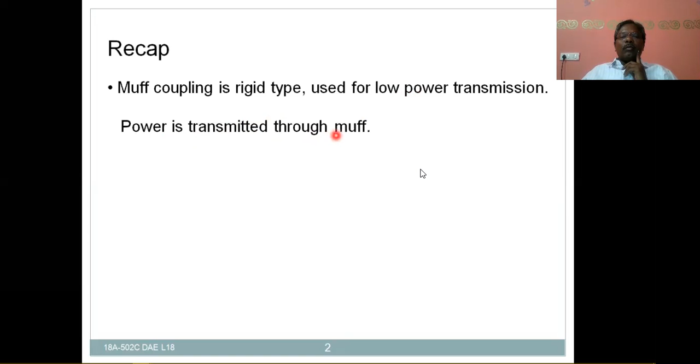In the previous class, we completed muff coupling, a rigid type used for low power transmission, with power transmitted through the muff. In split muff coupling, power is transmitted due to friction between the muff and shaft. For high power transmission, flange coupling is preferable.

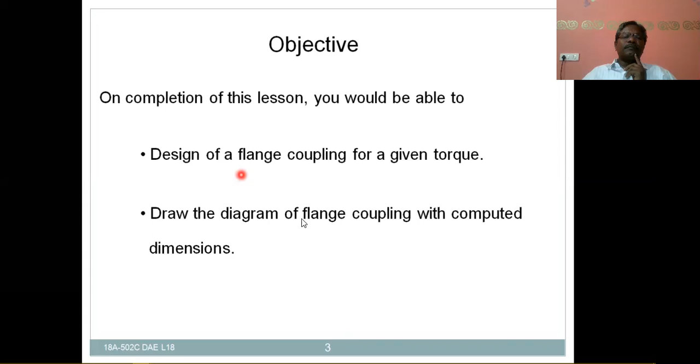Objectives of this lesson: on completion, you would be able to design a flange coupling for a given torque or power, and draw the diagram of flange coupling with computed, proportional dimensions.

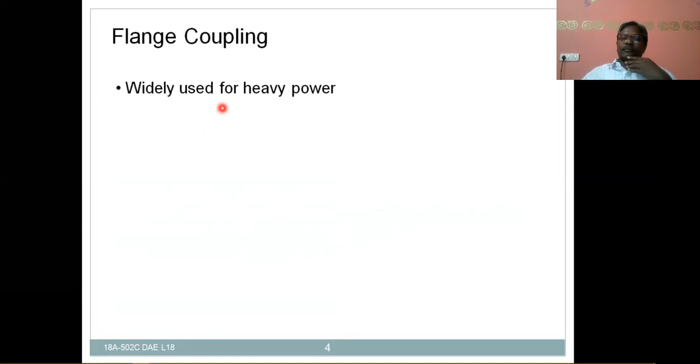Now the flange coupling. Flange coupling is widely used for heavy power transmission, and this power is transmitted at low speeds.

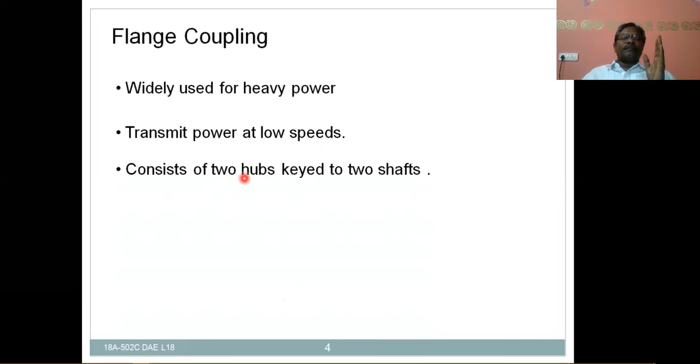This flange coupling consists of two hubs which are keyed to two shafts. The hub extends into flanges whose faces are brought and held together by a series of bolts arranged concentrically about the shaft so that their axes are parallel to the shaft axis.

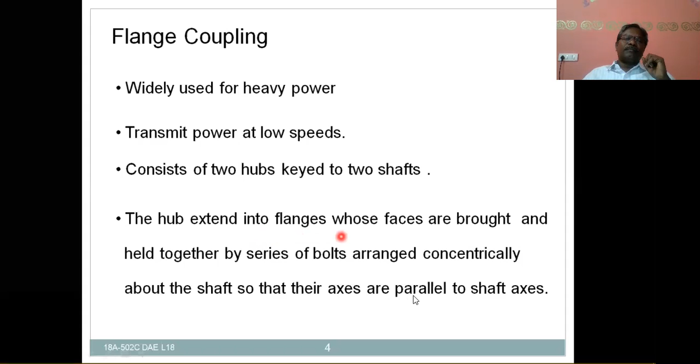To ensure correct alignment, one of the hubs has a circular projection which fits into a corresponding depression in the other hub.

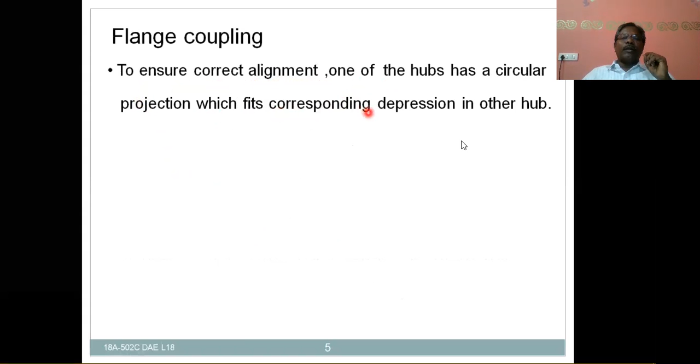Here you can see the sketch of unprotected type flange coupling. These are the two shafts which are to be joined, and this is one hub, and this is another hub, which is generally made of cast iron, while the shafts are commercially made of low carbon steel.

These hubs are extended towards the flanges, and these are the flanges. These two are brought together and held in position by means of bolts and nuts.

In order to ensure perfect alignment of the shafts in collinear axis, there is one recess in this hub - from here to here is the circular recess, and there is a corresponding projection in the left hub.

This projection perfectly fits into the recess of the right side hub. Thereby, the axes will be on the same line, which helps in getting perfect alignment.

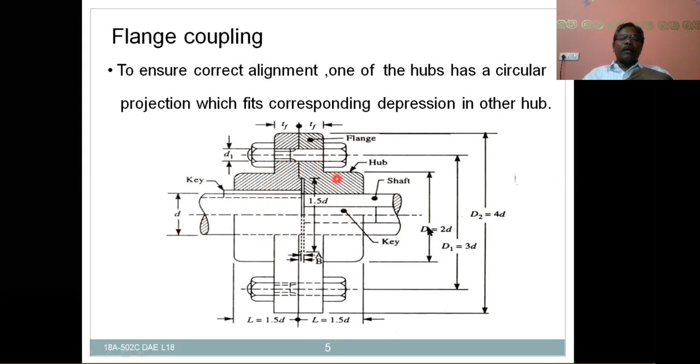Shaft, key, hub, flange, bolts and nuts, then flange, hub, and key, and shaft. This is the sequence of the power or torque transmission flow. The bolts transfer torque from one flange to the other flange and then to the shaft.

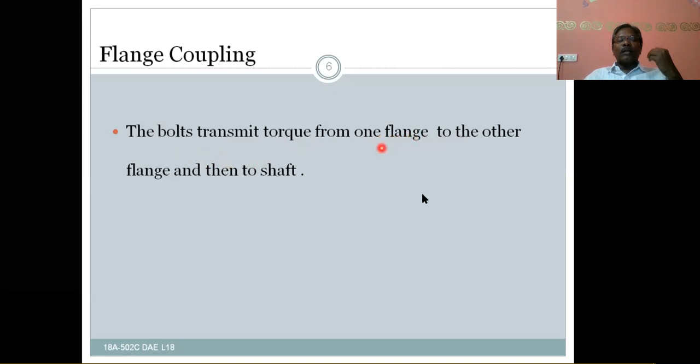Now the design of this flange coupling. Generally, same as in the previous case of muff coupling design - here also the flange coupling is designed with empirical relations first, and these values are checked for the given loading conditions.

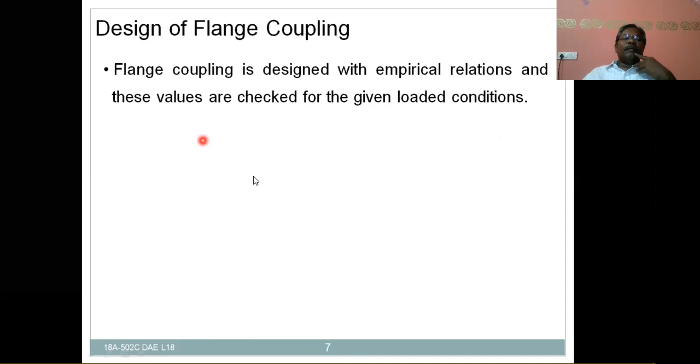And the proportions for CI flange: the outside diameter of the hub D is equal to 2d, where small d is the diameter of the shaft, or inside diameter of the hub, and D is the outside diameter of the hub. L, the length of the hub, is 1.5d.

And the pitch circle diameter of the bolts - through the circle there is a pitch circle, that is dP is equal to 3d.

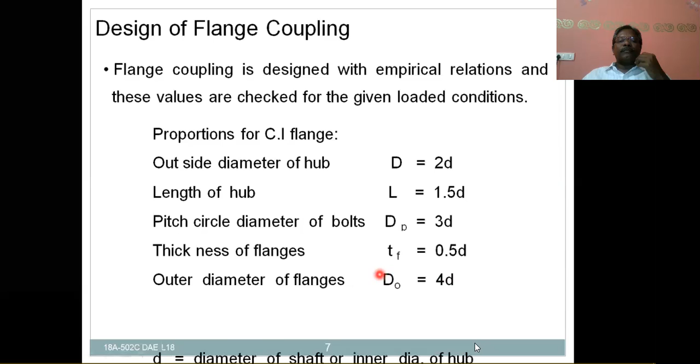Thickness of the flanges TF is equal to 0.5D, this is for unprotected type of flange coupling. And outside diameter of the flanges DO is equal to 4D, where D is the diameter of the shaft or inner diameter of the hub.

So these are the standard proportions as per the standards: outside diameter of the hub D is equal to 2D, length of the hub is equal to 1.5D, pitch circle diameter of the bolts dP is equal to 3D, thickness of the flanges TF is equal to 0.5D for unprotected type flange coupling, and outside diameter of the flanges DO is equal to 4D, where small d is the diameter of the shaft or inner diameter of the hub. These are the standard proportions.

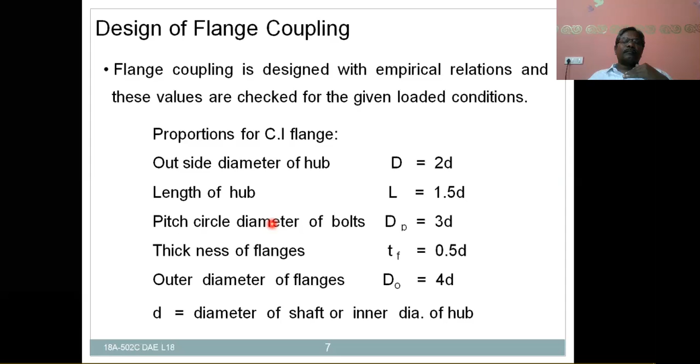Based on these standard proportions, we have to calculate the dimensions of various parts of the flange coupling, and then we have to check for corresponding permissible stresses under the given load conditions.

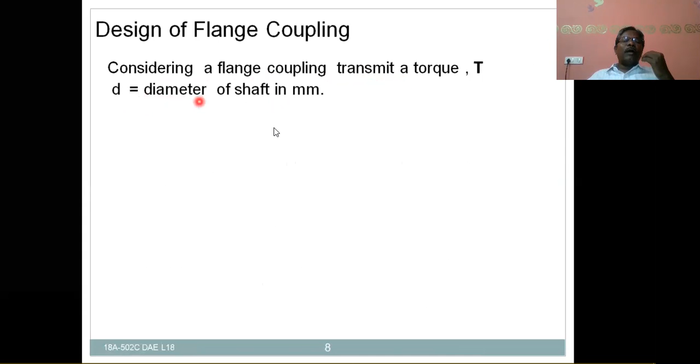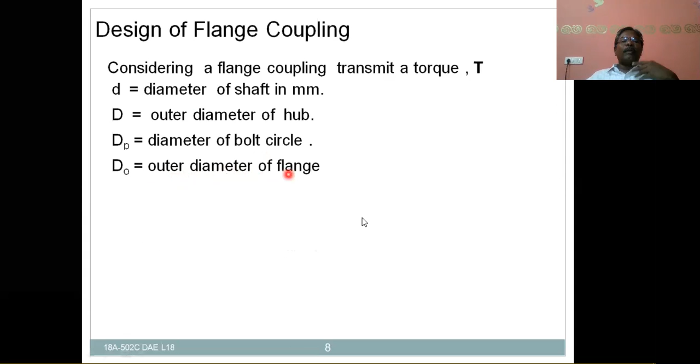So let us consider a flange coupling transmitting a torque T. D is equal to small d is equal to diameter of the shaft in millimeters, and capital D is equal to outside diameter of the hub, which is 2D in millimeters. dP is equal to diameter of bolt circle or pitch circle diameter, which is 3D, and Do is equal to outer diameter of flange, which is 4 small d. Fs is equal to allowable shear stress for shafts, key, and bolts.

Generally the shaft, key and bolts are made out of the same material, so the shear stresses and crushing stresses may be the same for these three elements. Fc is equal to allowable crushing stress for key and bolts. Fs1 is the allowable shear stress for hub and flange material. Generally the hub and flange materials are cast iron, that's why this is different.

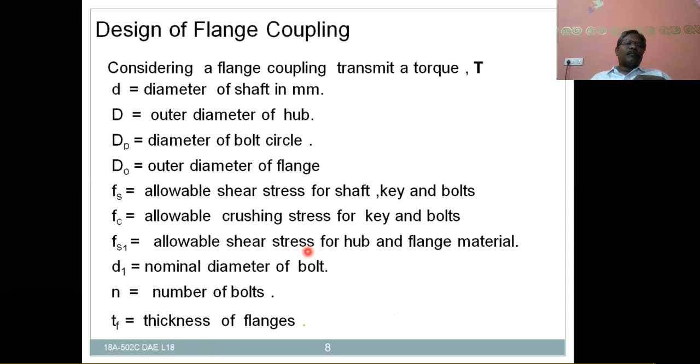D1 is equal to nominal diameter of the bolts, small n is equal to number of bolts, and Tf is equal to thickness of the flanges, which as per the previous discussion is 0.5 small d, for unprotected flange coupling. These are the notations for flange coupling.

First of all, we have to calculate the diameter of the shaft by using the power and speed formula. Power formula is P is equal to 2 pi NT by 60, and you are going to get the T value, that is torque value.

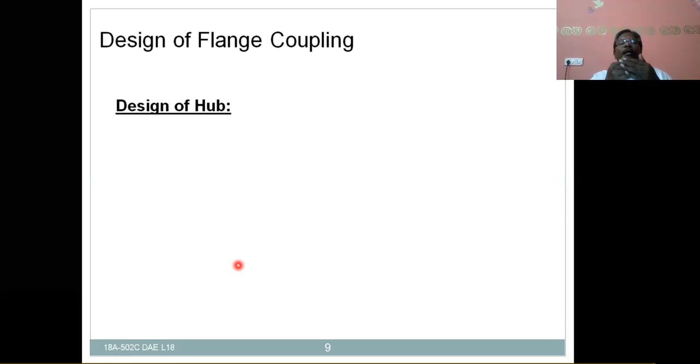By using torque or twisting moment, we have to calculate the shaft dimensions, that is shaft diameter, by using torque formula: T is equal to pi by 16 Fs d cube. With this formula, you are going to get your diameter of the shaft. After getting diameter of the shaft, you have to calculate the proportional dimensions of each part of the flange coupling, and check for various stresses induced in all the parts.

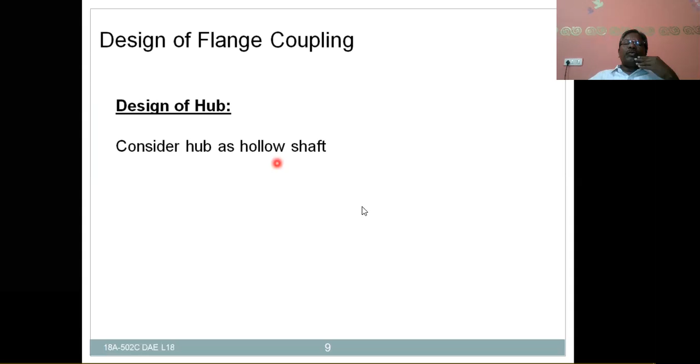So after finding the diameter of the shaft, let us design the hub of a flange coupling. Consider this hub as a hollow shaft.

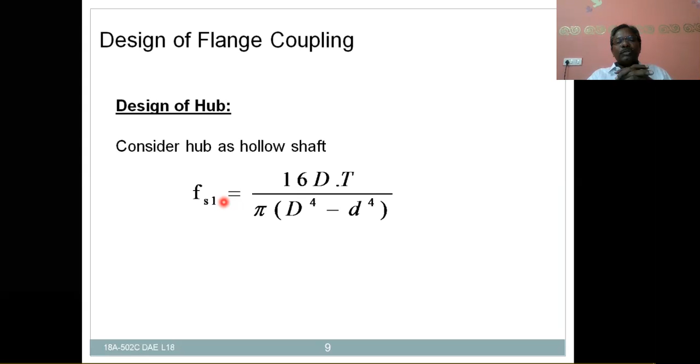As it is a hollow shaft, the shear stress induced in the hub, Fs1, is equal to 16 capital D into T, where T is the torque, divided by pi into D power 4 minus small d power 4. This will be the induced shear stress in the hub, which should be less than its permissible value. If it is not within the permissible value, you have to recalculate the dimensions and check again that the induced stress is less than the permissible value.

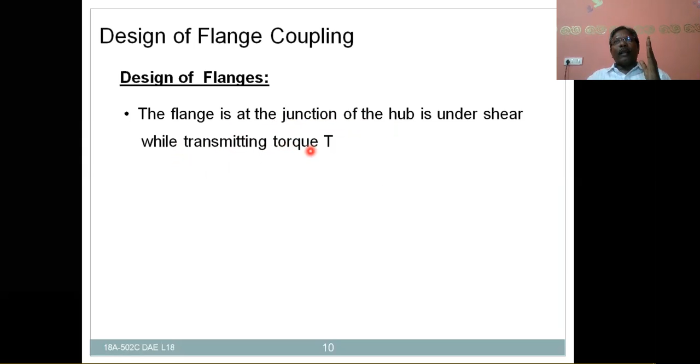Design of flanges. The flange at the junction of the hub is under shear. Between the hub and the junction, there is a possibility of shearing while transmitting torque. That's why the thickness of the flange into the circumferential length at the junction of flange and hub is the shearing area, that is pi capital D into thickness of the flange.

So torque is equal to shear area into shear stress into radius of the hub. This will be the circumferential length at the junction of hub and flange, and this will be the thickness of the flange, and Fs1 will be the shear stress induced in the cast iron, and radius of the hub is d by 2.

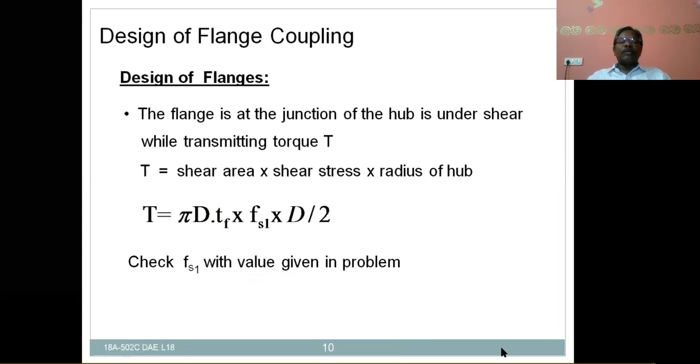With this formula, you have to check for the induced stress, because all these are calculated based on the proportions only. So check Fs1 with the value given in the problem, that is the permissible value. If it is less than the permissible value, then only the design will be safe.

Next is design of key. It is also similar to the previous muff coupling.

Here also in the keys, we have to calculate the standard proportions and dimensions. Width of the key is equal to breadth of the key, which is equal to d by 4, whereas the thickness of the key is equal to d by 6, or 2 by 3rd of w, and the length may be equal to the length of the hub, that is 1.5d, which is also equal to the length of the key.

Then after calculating the width, thickness, and length of the key, verify, that means check for induced stresses in crushing as well as shearing of the key.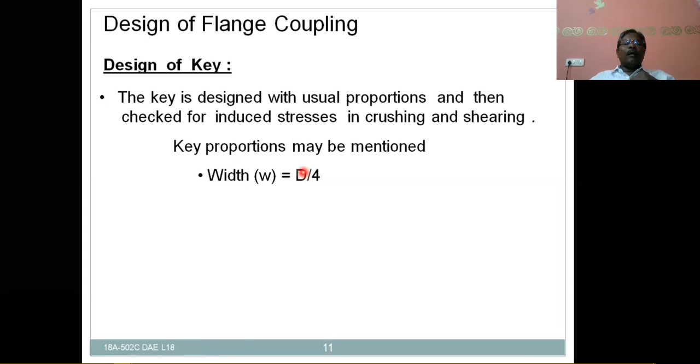As per the proportions, width of the key is equal to d by 4. This should be small d, not capital D. And this should be small d, which should not be the capital D.

Thickness of the key, and we have to check for Fs is equal to 2t by WL small d, and Fc is equal to 4t by TL into small d. We have to check for shear stress and crushing stress, which should be less than their permissible value.

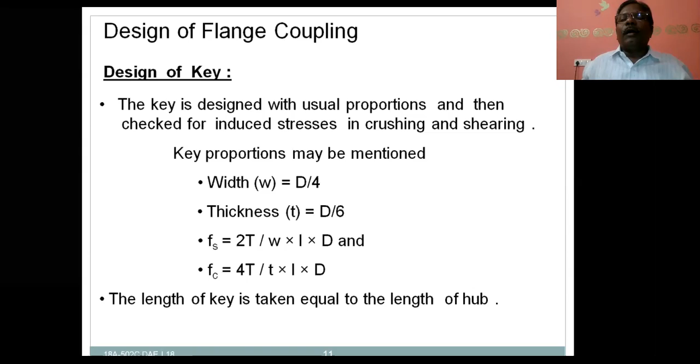The length of key may be equal to the length of the hub, as I told you. So after checking the shearing and crushing of the key, if it should be less than their permissible values, then only the design is safe. Otherwise, we have to modify the dimensions of the keys.

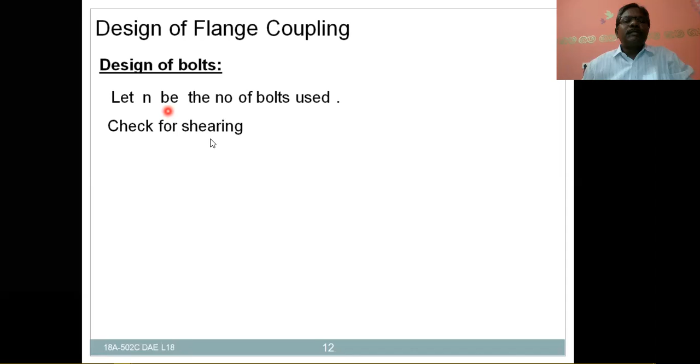And the last one is design of bolts. Let n be the number of bolts used, which depends on the diameter of the shafts. And after getting n value, that is 3, 4, and 6, based on the diameter of the shafts.

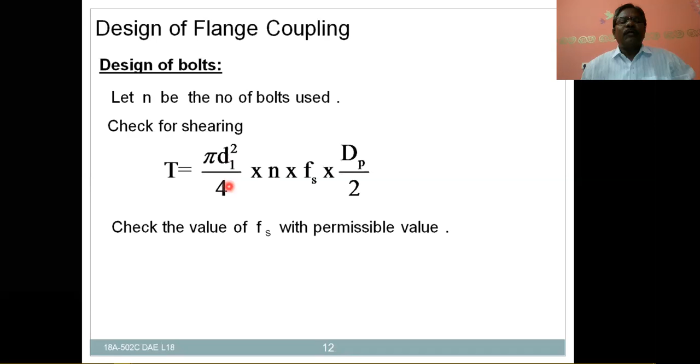So after getting the n value, you have to check for shearing stress, that is T is equal to pi by d1, where d1 is equal to nominal diameter of the bolts, pi d1 square by 4 into n into Fs, shear stress in the bolt, into pitch circle diameter by 2, and check for the shear stress with permissible value.

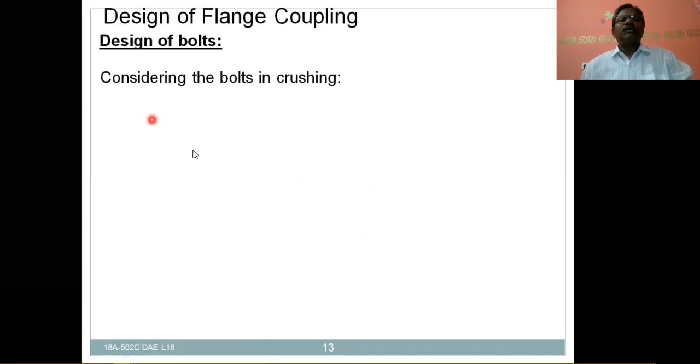And also considering the bolts in crushing, crushing area will be d1 into Tf, and n will be the number of bolts, and Fc will be the crushing stress, and dp by 2 will be the radius at the pitch circle diameter. So with this, you have to check for crushing stress, which should be less than the permissible value.

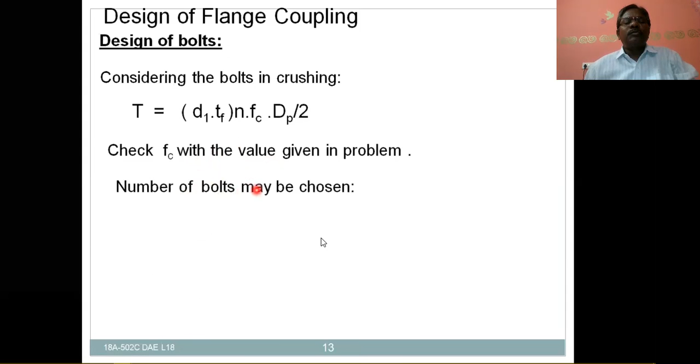And the number of bolts may be chosen as 3 for shafts up to 40 mm diameter, and 4 for shafts up to 100 mm shaft diameter, and 6 for shafts up to 180 diameter. So with this, we concluded the design of flange coupling.

Once again, let us see the design of flange coupling. First of all, you have to calculate the shaft diameter by using power and torque equations. After getting the shaft diameter, you have to assume the hub as the hollow shaft. You have to get the proportion dimensions of the hub and check for the shearing stress induced in the hub.

And next is flange. Here also it is made out of cast iron. That's why the shearing stress should be the same, the permissible value may be same as the hub value, whereas it may fail in two ways.

Number one is shearing at the junction of the hub as well as the flange, and also it may fail due to crushing also at the bolts, right? And we have to check for this.

Next is keys, same as the previous case. Calculate the proportional dimensions and check for crushing and shearing stresses. And then finally the bolts.

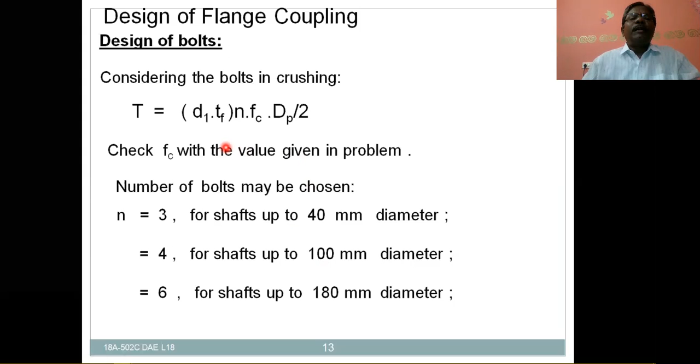And let us see one problem based on this design of flange coupling.

Here you can see a 60 diameter shaft. The diameter of the shaft itself they have given for us is transmitting 150 kilowatts power at 300 revolutions per minute speed, and a flange coupling has 6 bolts.

Number of bolts n is equal to 6, and each 18 mm in diameter. Bolt diameter also given, d1 is equal to 18. Find the required diameter of the bolt circle, dp you have to calculate, pitch circle diameter you have to calculate, if the allowable shear stress in bolt material is 27.5 Newton per millimeter square.

Anyway, this will be easy for us to solve this problem. And direct formula, torque is equal to...

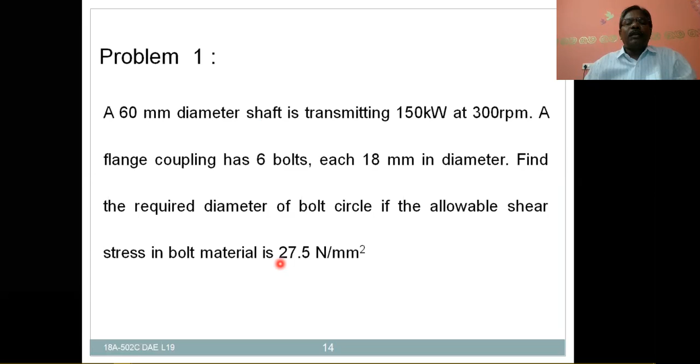pi/4 d1 square into fs into n into dp by 2, and torque you can calculate by using either the shaft power formula, P is equal to 2 pi NT by 60. After getting torque, simply substitute all the values and then get your bolt circle diameter or pitch circle diameter.

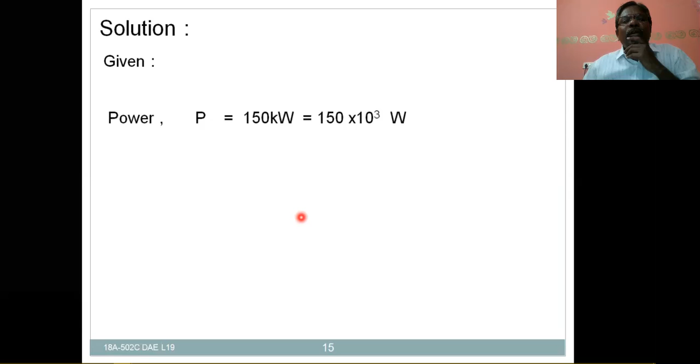Solution, let us see. The given data is power is equal to 150 kilowatts, that is 150 into 10 to the power of 3 watts, and speed n in terms of rpm is 300, and the shear stress for bolt material may be Fs, that is 27.5 Newton per millimeter square.

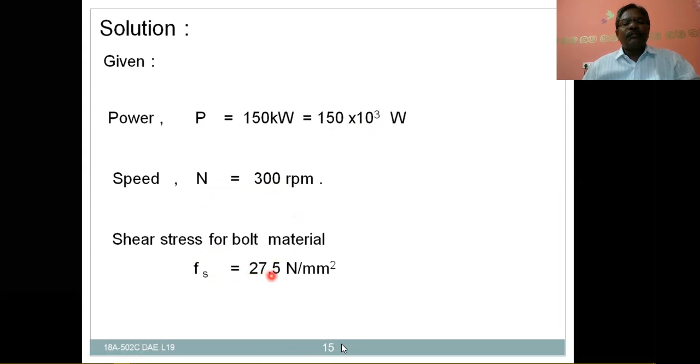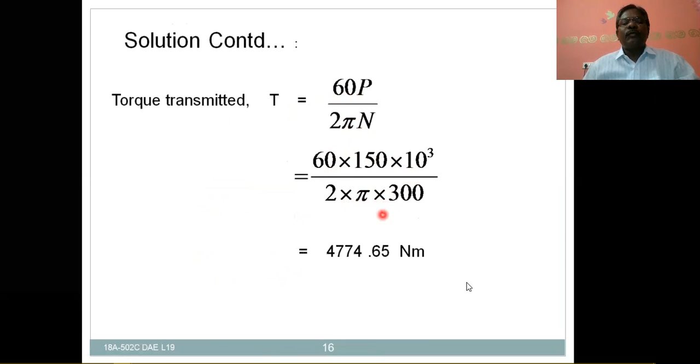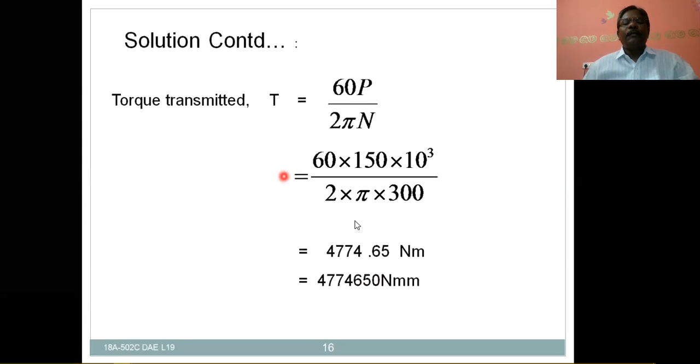And the torque transmitted is equal to 60P by 2 pi n, and that is 60 into 150 into 10 to the power of 3 by 2 pi into 300, that you will get 4774.65 Newton meters. So that may be converted into Newton millimeters, that is 47,74,650 Newton millimeters. Now let us consider the shear strength for bolts.

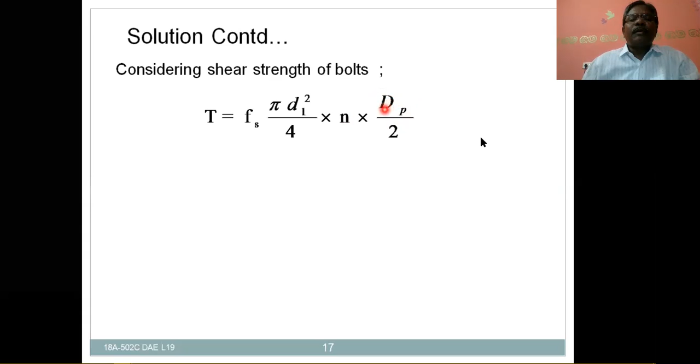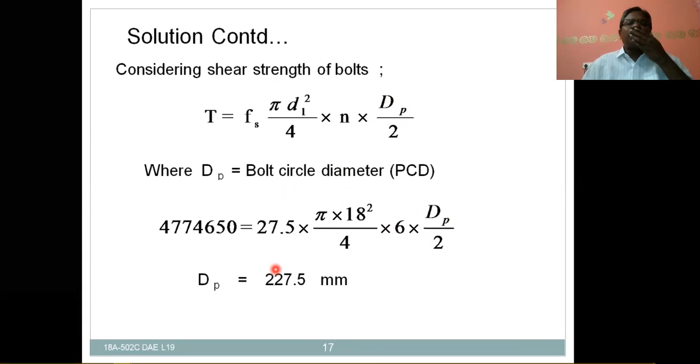T is equal to Fs into pi by 4 d1 square into n into Dp by 2. Here you are having Fs and you are having torque and you are having bolt diameter. n is also given, 6, and only unknown is Dp, the pitch circle diameter or bolt circle diameter. So after substitution only the leftover is Dp. So the bolt circle diameter or pitch circle diameter, Dp, is equal to 227.5 millimeters.

So this is all about the discussion that we have made for design of flange coupling, and these flange couplings are applicable in many areas. In villages we can see these flange couplings by joining an electric motor to the water pump. That is quite commonly used in several areas.

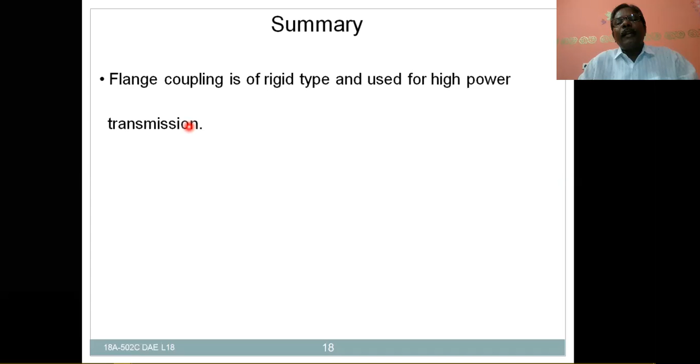And here let us see the summary of this lesson, today's lesson. Flange coupling is of rigid type. This is the rigid flange coupling, why? Because the axis of both the shafts which are to be joined are in the same line and also aligned, and used for high power transmission. Whereas the previous coupling may be low power transmission, and also split muff coupling also used for low power transmission, whereas this is for high power transmission at low speeds, right? And power transmission from one shaft to other shaft takes place through flanges and bolts.

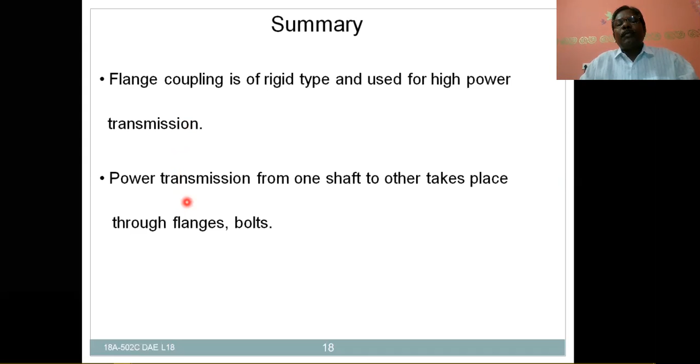That means key, hub, flange, bolts. We are going to take the power transmission in this flange coupling. Protected flange coupling has protruding bolts and nuts covered by flanges to avoid danger to workmen who might be near the coupling. Let us have, in the next lesson, about the protected flange coupling.

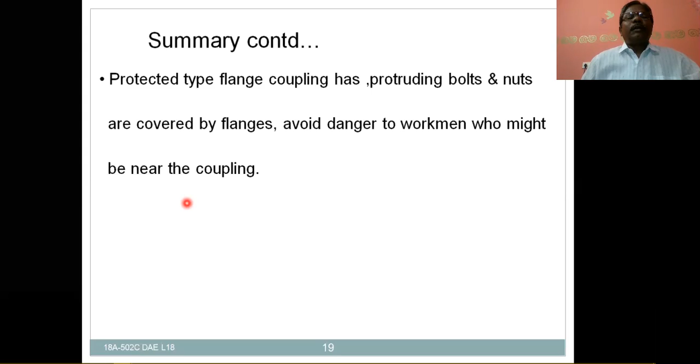And design of flange coupling includes hub design, flange design, key design, and bolts design. The design of flange coupling mainly includes hub, flanges, key, and bolts design.

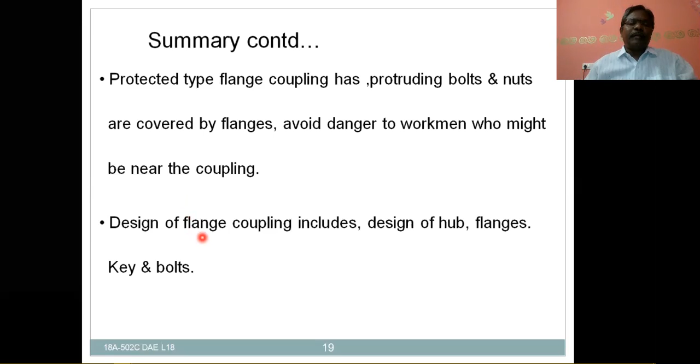So this is all about, once again, let us see the construction as well. As we have completed so far, construction of the flange coupling, also working of the flange coupling, notations, standard proportions, and design procedure, and then we completed one problem.

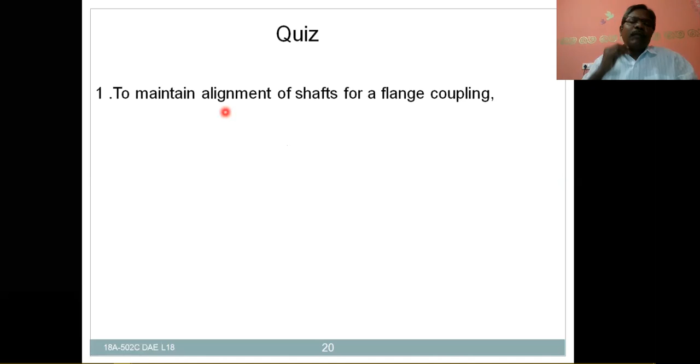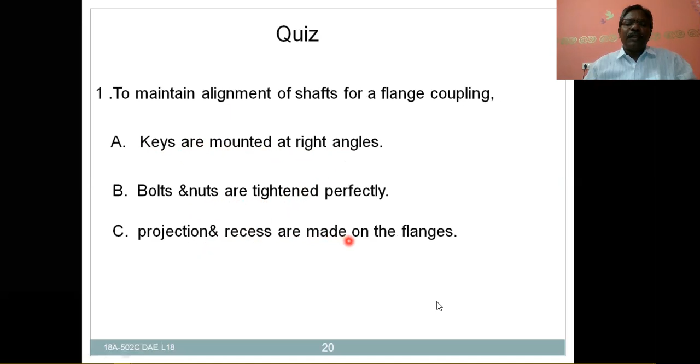Okay, so with this lesson, let us have a small quiz about this flange coupling. To maintain alignment of shafts for a flange coupling: keys are mounted at right angles, bolts and nuts are tightened perfectly, projection and recess are made on the flanges, projection and recess are made on the hubs, which is the right answer.

Number one answer is keys are mounted at right angles. Number two is bolts and nuts are tightened perfectly. And C is projection and recesses are made on the flanges. And D is projection and recesses are made on the hubs, which is the right answer. As per our previous discussion in this lesson, simply we can say D should be the answer, because the left side hub will have projection, whereas the right side hub will have corresponding recess, and they will certainly fix one in another. Thereby, the axis may be perfectly aligned. So that's why the answer must be D, right? So projection and recess are made on the hubs is the right answer.

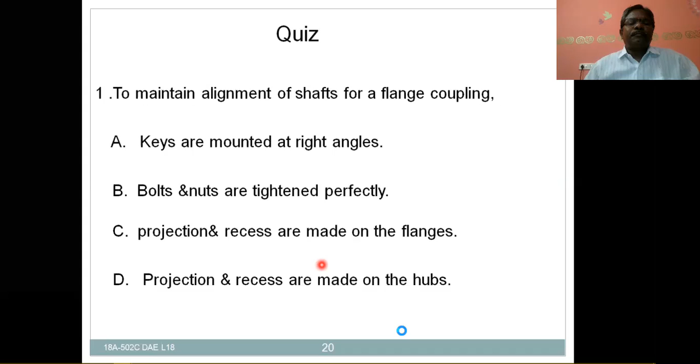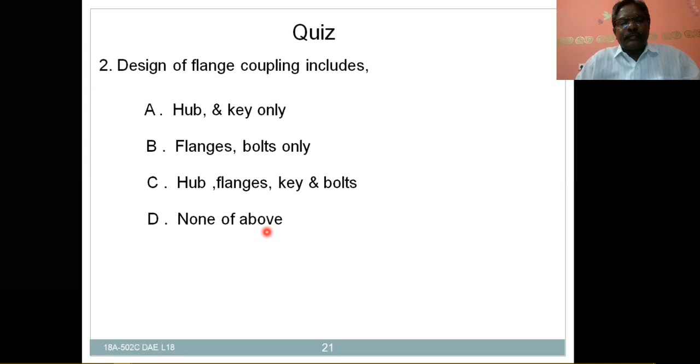Design of flange coupling includes: A, hub and key only; B, flanges and bolts only; C, hub, flanges, key and bolts; D, none of the above. As per our discussion, the answer should be C, because it consists of shafts, hub, flanges, keys, and bolts. So they include the design of hub, flanges, key, and bolts, right? That will be the answer.

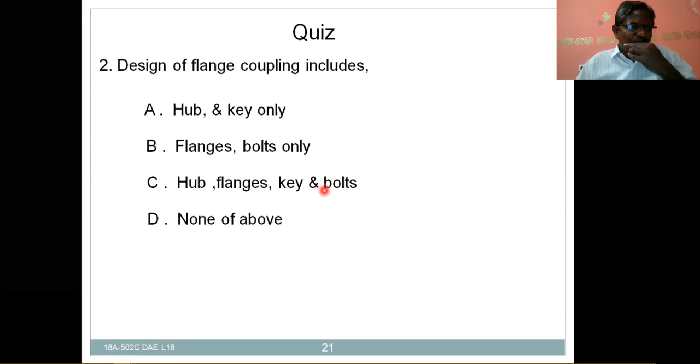So right, so with this we conclude our lesson. Design of flange coupling, corresponding construction details, working principle, corresponding notations, standard proportions, and design procedure, and one formula. So with this, we conclude our lesson, right? Thank you.